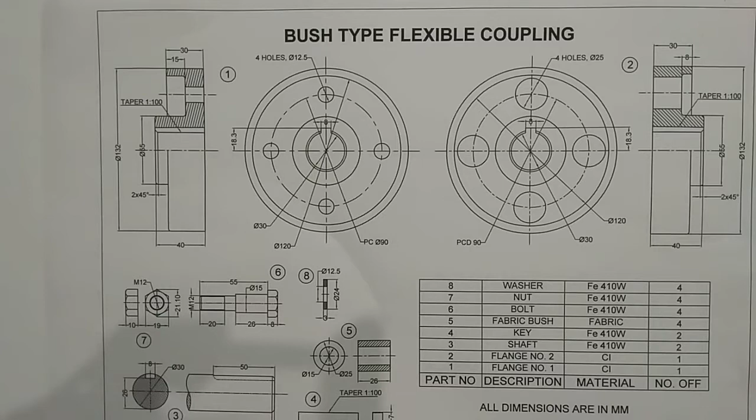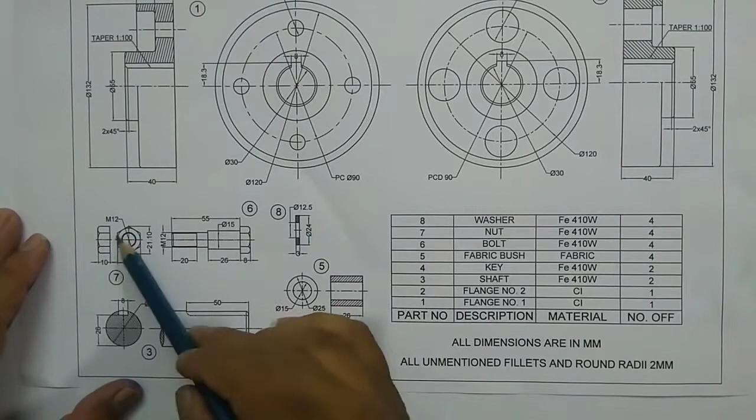Assalamu alaikum. Today we shall see how to draw bush type flexible coupling. So it contains 8 parts. Part number 1, flange 1, flange 2, then shaft 3, then key and fabric bush, bolt, nut and washer. So we have to assemble this and we are going to draw the half sectional front view and side view of this part drawing.

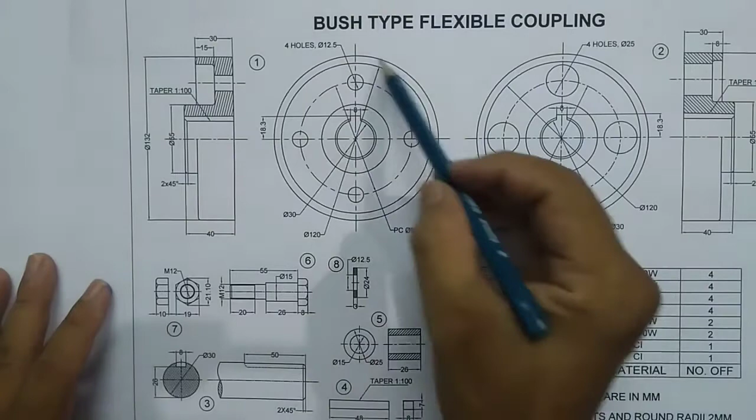So first we shall draw the side view. I am going to draw the left side view for this assembly drawing. So I am going to draw this diagram here. I have already drawn two center lines. In that we are going to draw the side view over here. So you can see there are 1, 2, 3, 4, 5 circles. So I am going to draw these 5 circles first.

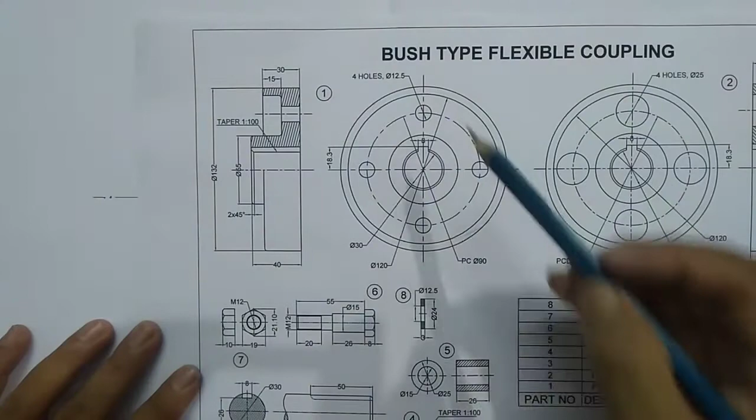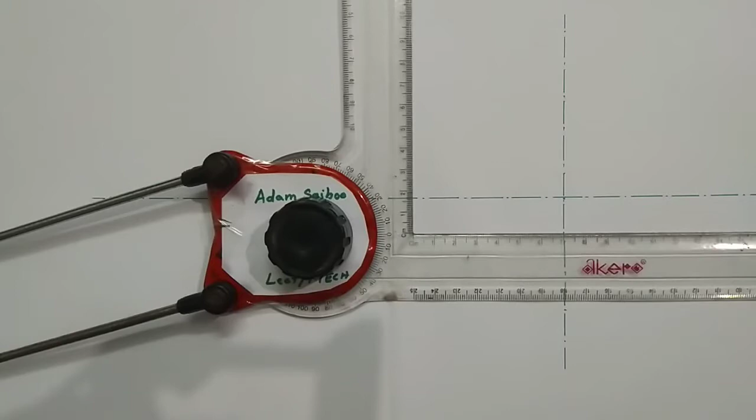So first circle diameter is 30. So the radius will be 15. Measure 15. And draw a circle.

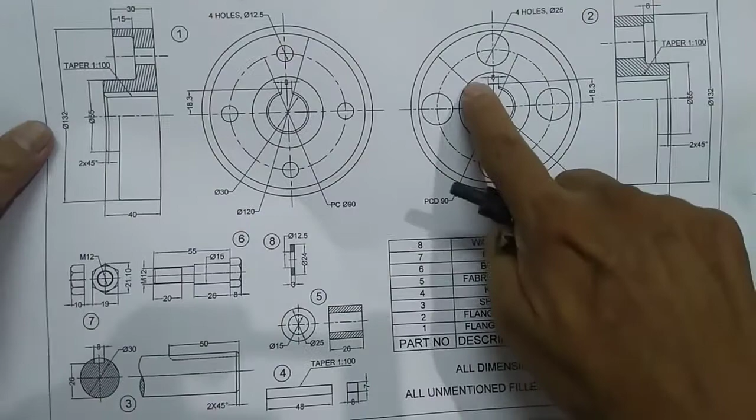Then the second circle diameter, it was not given here, but in the side it was given as 55. So half of 55 means 27.5. Measure 27.5 in ruler and then draw another circle.

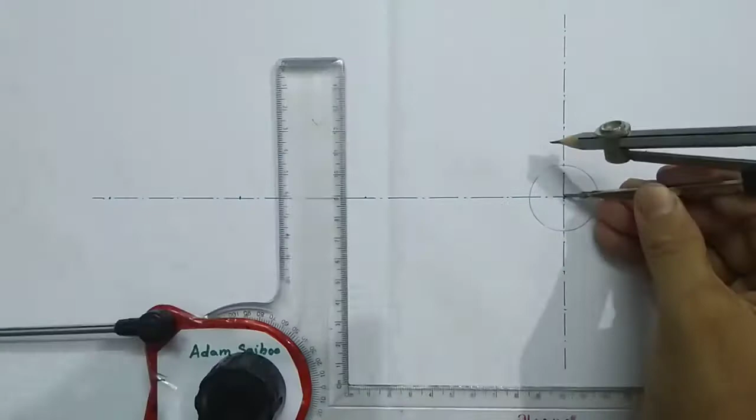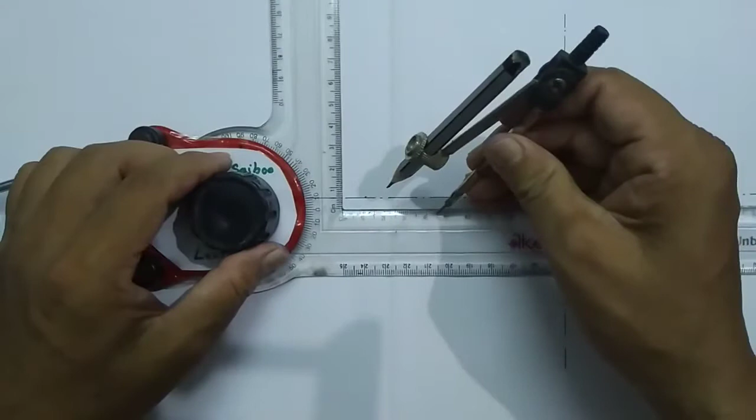The next circle is the pitch circle of diameter 90. So 90 means the radius will be 45. I have measured 45. Draw this circle very light because this one is a center line.

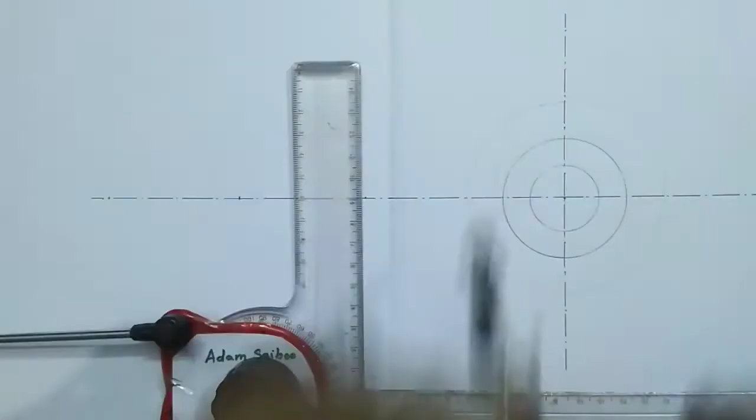Next, these two circles. One of the circle diameter is 120. So the radius will be 60. Measure 60.

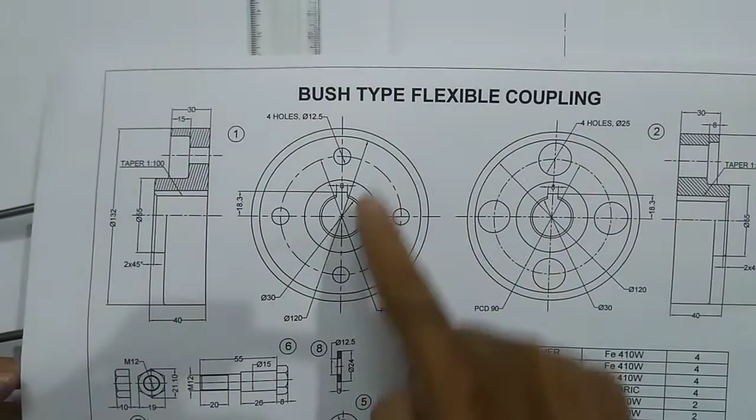And the last circle diameter, these two diagrams are almost same. A small thing, you can see a difference. And the last circle diameter was not given here, it was given here 132. So half of 132 is 66.

This one is a center line. So I am going to draw center line here. Dash dot like that.

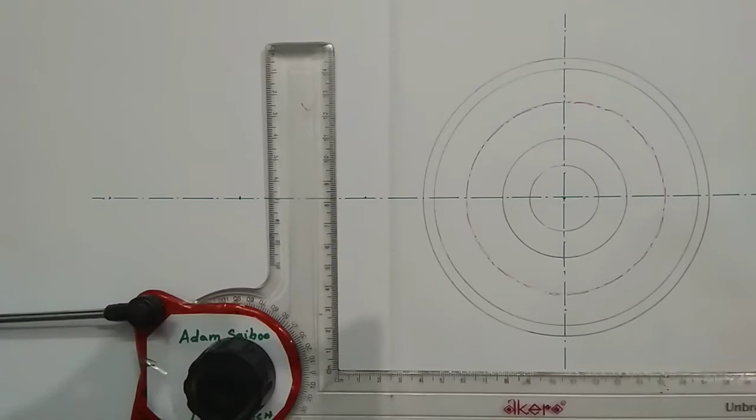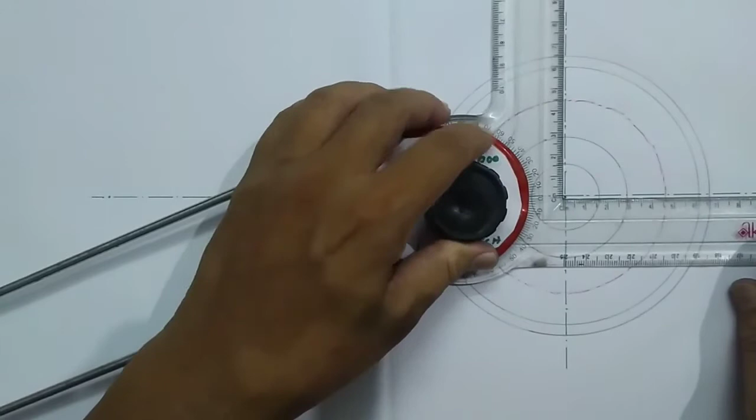So the next thing is you can see a small keyway cut on this flange. So the height from the center point is 18.3. You mark 18.3 mm. 18.3 means somewhat above 18 here.

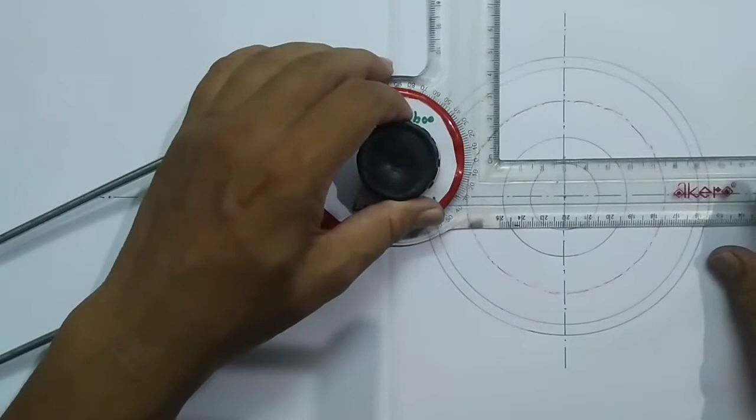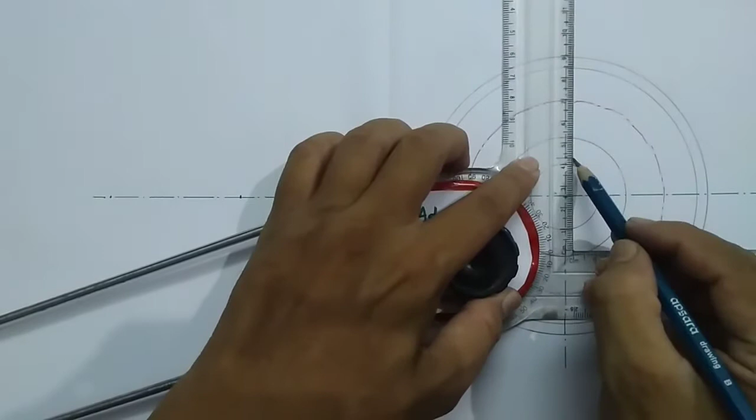And the width of the keyway is 8. So 8 means 4 here and 4 on the right side. Okay. This side 4 mm, this side 4 mm. Totally you will get 8 mm.

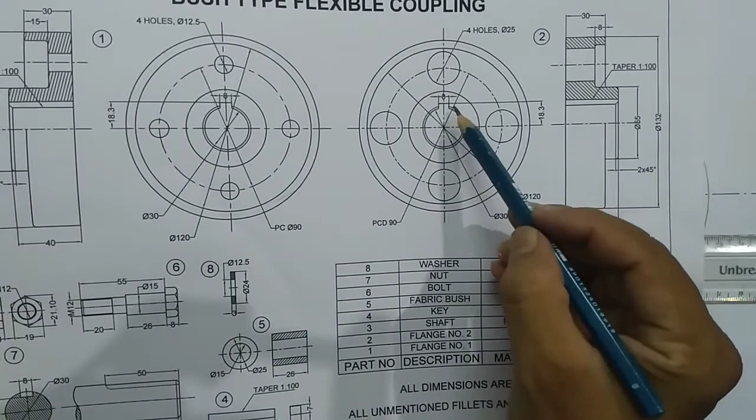Also you can see another circle here. This circle is because of the chamfered line. Here the hole is chamfered, so you will get another circle here. We shall draw this circle after front view, because from that only we have to project it.

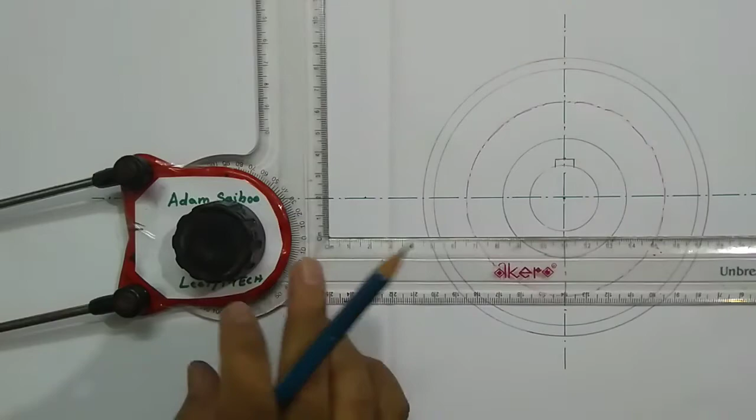So next thing, we shall start the front view. So I am going to draw this portion here. First to draw a vertical line. This line I am going to draw first. The value is 132. Half is 66.

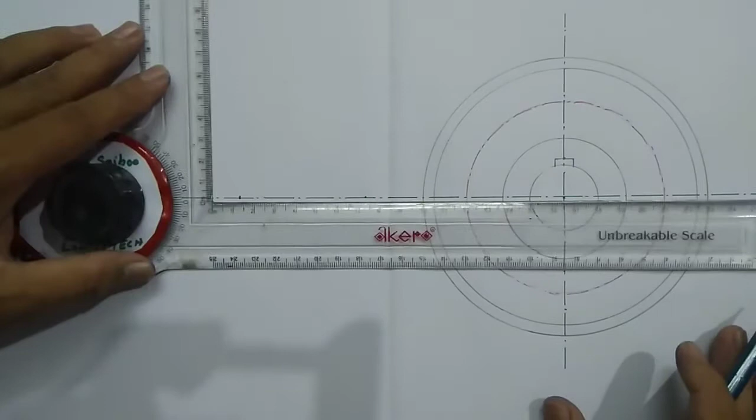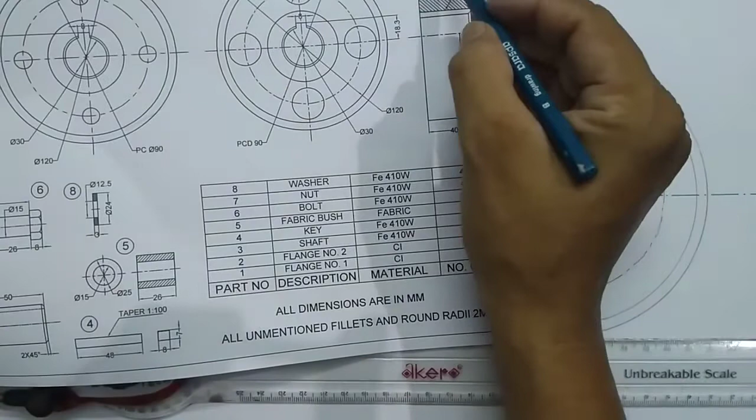Then I am going to draw this line. This line is 30 mm offset. 30.

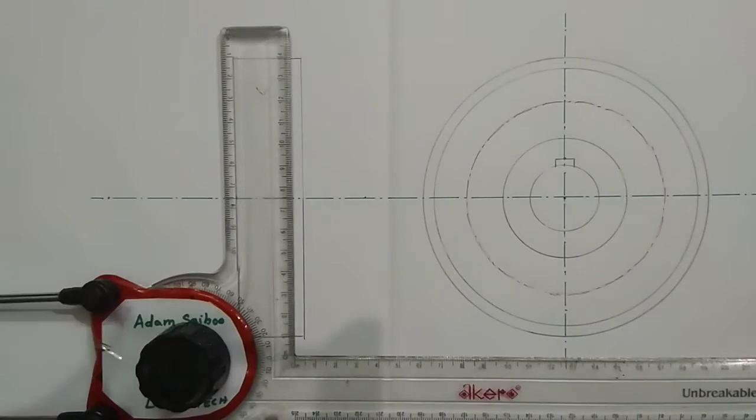Then we shall draw this line. This line is 40 mm from this point, and also the width is 55. So from here you mark 40 mm, and just to draw a rough line, we can project the width from here, from the side view.

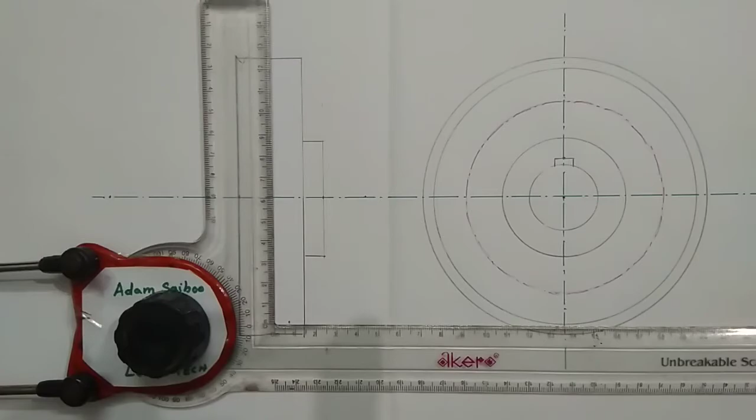So next I am going to draw this center line. This center line is coming from this point. So I am going to project from this point. From here I am projecting the center line.

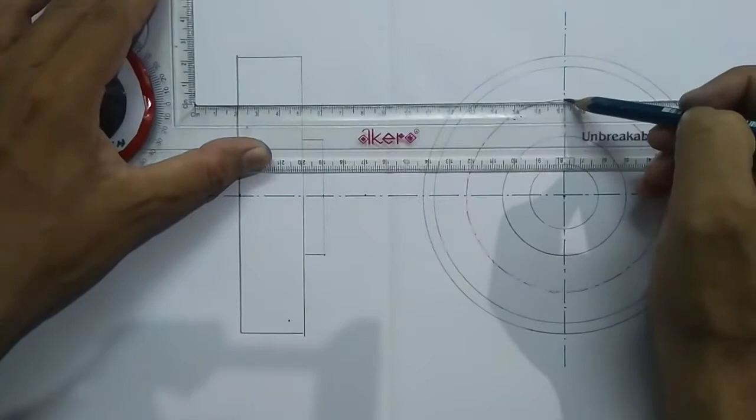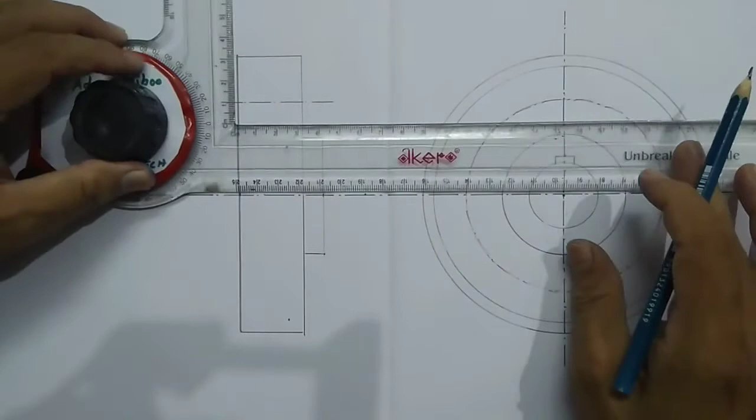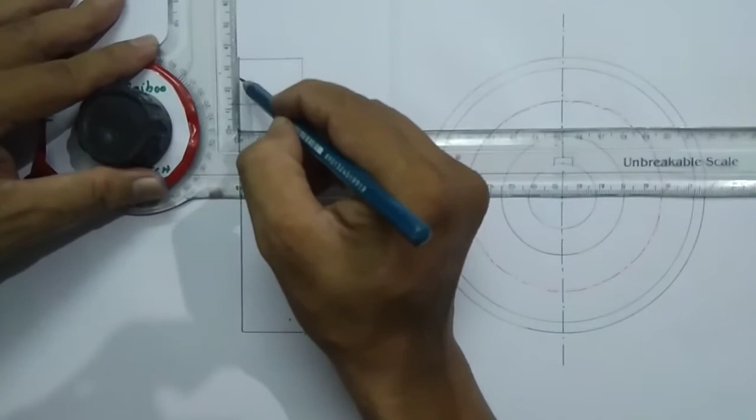Here you can see the hole diameter is 25 mm. So when we project this line, you will get this distance 25. So 25 means 12.5. So here, from here I am marking 12.5. So this distance 12.5, this distance 12.5. So totally you will get 25 mm. So here you can see this thickness is 8 mm.

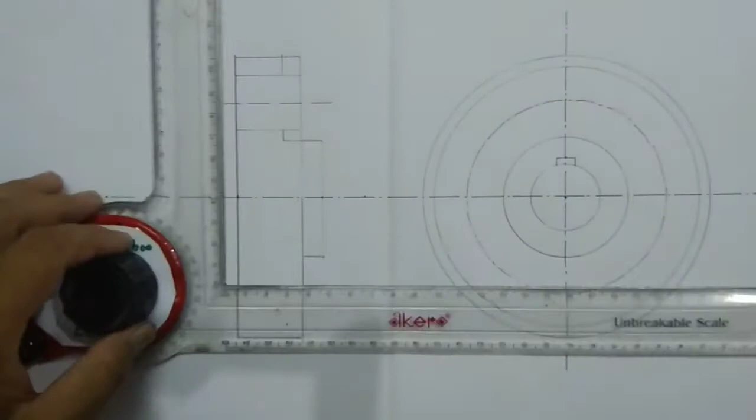So next I'm going to draw this line. This line we have to project from this point. So from here you project a line.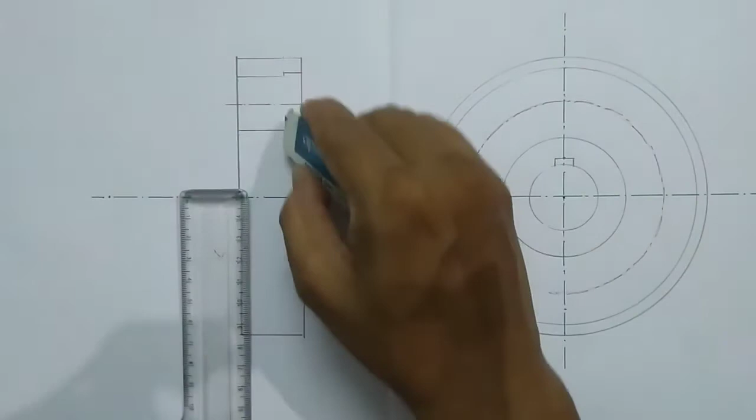As I'm going to draw the half sectional front view, I'm going to section at the top, so I'm not going to section at the bottom. So I'm not drawing this point over here.

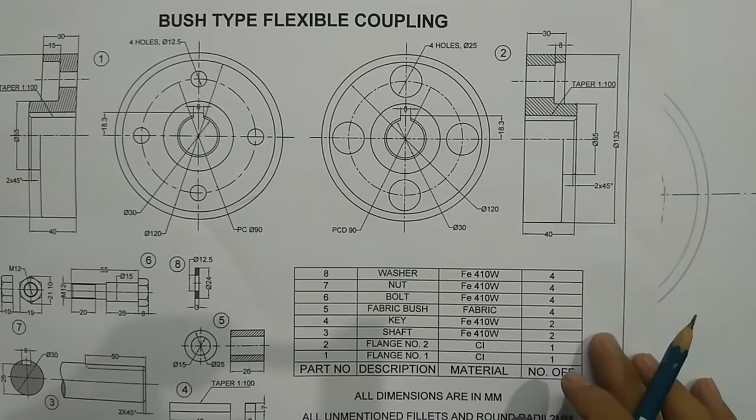So the next thing is I'm going to draw a hole here. The hole width is actually 30 mm. This one is a 30 mm hole. So we shall draw here 30 mm hole. 30 mm means 15, 15. So from here 15.